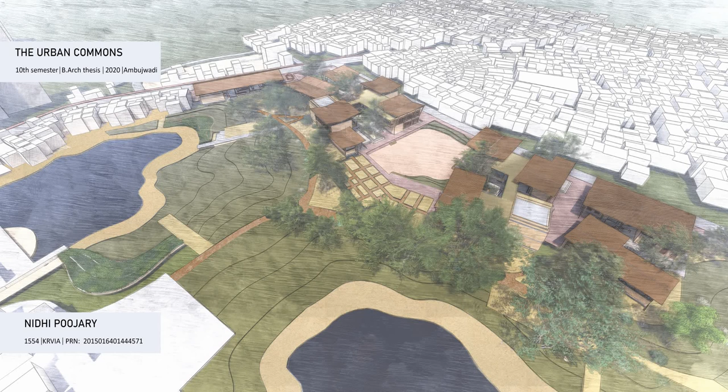My name is Nidhi Poojary and my topic is the urban commons.

The presentation is divided into 4 parts: the argument in brief, the site study which has the programs and site analysis, the design, and the technology which has the details and the service systems.

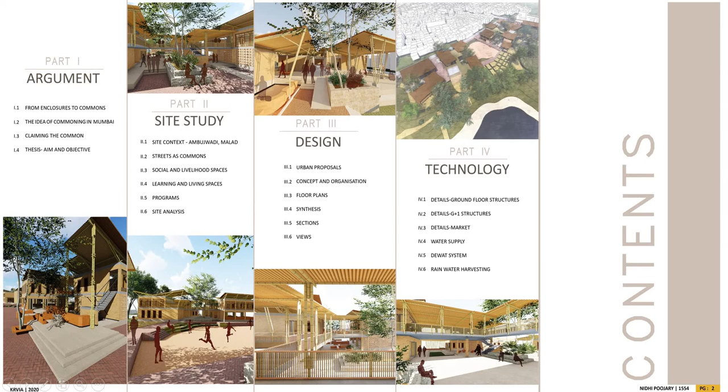From enclosures to commons. The concern in recent times is that there is a loss of urban commons due to privatizations, enclosures, spatial controls, etc. These only cater to a certain class of people who are privileged, and hence arises the idea of commons.

So what are the commons? Communities have various relationships with the spaces around them. They tend to appropriate a given space. This taking over of space or laying claim to a space is commoning. These shared spaces act as resources to all, and they are managed by the people themselves.

There are 3 aspects to the commons. They have a non-commodified common pool of resources which fulfills people's needs. The commons are necessarily created and sustained by the communities, and to common is a verb that is a social process that creates and reproduces the commons. The important thing to note is that the communities define the management of these resources and how they are accessed and maintained.

The threats to the commons. Why are the commons at risk? Because cities in India are trying to reinvent themselves as utopias for investors and consumers. New enclosures are directed towards fragmentation and destruction of the commons, hence there is a need of defending space. There are various ways in which the commons are interpreted, but here in this project, commoning is mainly looked at as a mode of resistance to commodifying.

The last part talks about the right to the city, or city as a co-created space. A potentially liberating space can be seen as a network of spaces belonging to nobody and everybody at the same time, which are not defined by a fixed power geometry but are open to the constant process of redefinition.

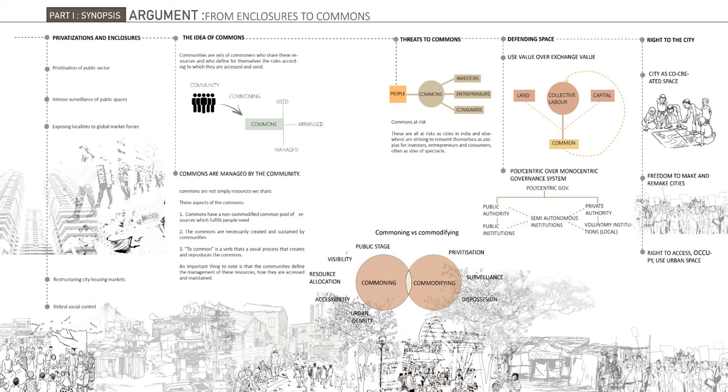The ideas of commoning in Mumbai. In a more traditional sense, the commons are these shared natural resources like tabelas, fisheries, forests, mangroves, etc. People access these resources that are not commodities and are not strictly classified as property. These are government lands that are used for livelihood dependencies.

For example, the commons for fish workers constitute not just the sea and the water bodies but also several areas along the coast used as landing grounds, weaving, or repairing, etc. These livelihoods are permanent or seasonal sources of income for a range of native people. The people have turned these private or government lands into common pool resources.

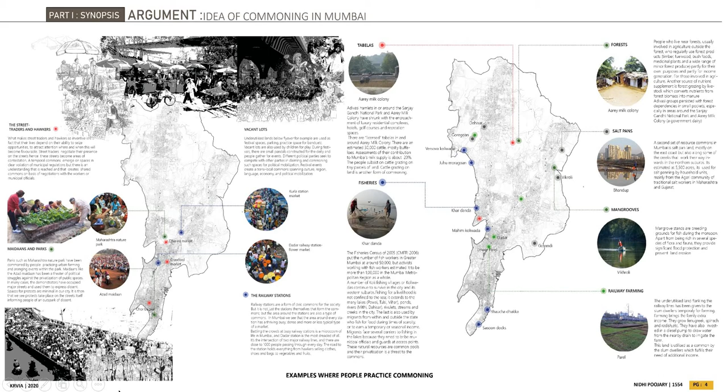But in today's urban context, it can be interpreted in several different ways. Certain ways in which people use the streets, the maidans, parks, the vacant lots, or the residual areas in the city can also be termed as commoning. These kinds of commons are going to be explored further in the project.

I visited several sites in Mumbai such as Ambujwadi, Bheemchaya and Mandala. Here, auto-constructed settlements seem to grow out of an awareness that commoning is necessary and helpful. Land occupations make people confront from the beginning the problem of building a family shelter with the necessary help of others and emerging community. Some auto-constructed facilities are created, either water tanks, rubbish collection points, or social spaces.

The arrangement and maintenance of the streets in this settlement is also indicative of practices of commoning. The street is not a necessary residual space but a space which is formed through collective decisions and collective work. Ambujwadi, a settlement in Malvani, has been demolished multiple times, but there is some sort of collective resistance seen here, trying to reclaim the land for their own sustenance.

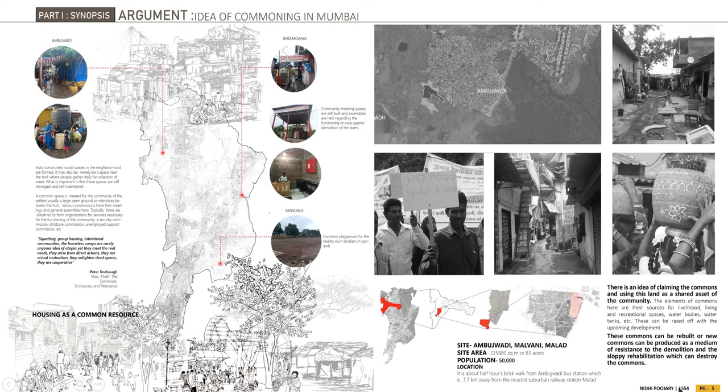What the project is taking from the case study of Ambujwadi is that it's trying to understand the existing commons on the site, look at it through the perspective of collective claims made by the community, and try to rebuild those commons so that it can be used as a shared asset of the community. And that is the aim of the thesis.

It's an attempt to rebuild the urban common as an equitable and accessible resource to all. It's also addressing architecturally the creation of these commons and how design can contribute to it, and how it can empower the community and reproduce their life in new ways.

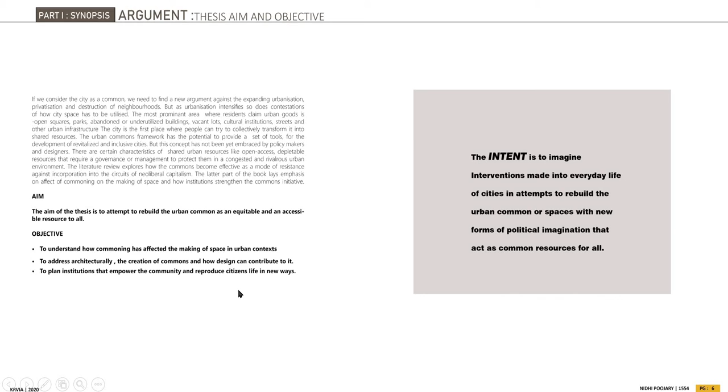The site context: Ambujwadi is present here at the bottom of Malvani in Malad. It's about 7.7 km from the nearest railway station, and there are a number of bus stops present in Malvani to reach it. In terms of educational institutions, there are a number of colleges or schools in Malvani but none in Ambujwadi.

There are some MHADA and MIG buildings over here, but Ambujwadi is a completely informal settlement, and there are some open grounds and municipal markets in Malvani, but none in Ambujwadi.

According to the DP 2034, the people will be rehabilitated in this rectangular plot present over here, and this part of the site also comes in the CRZ II zone.

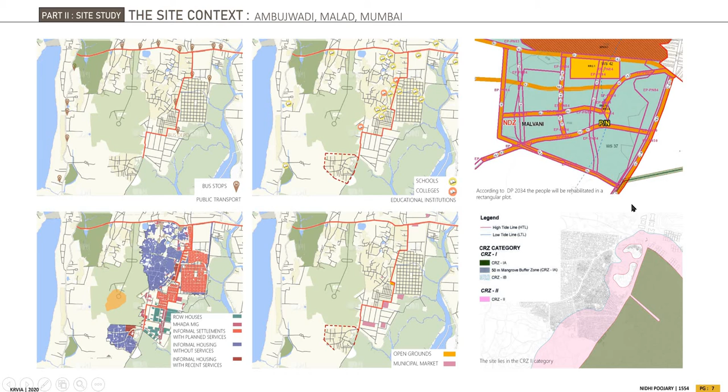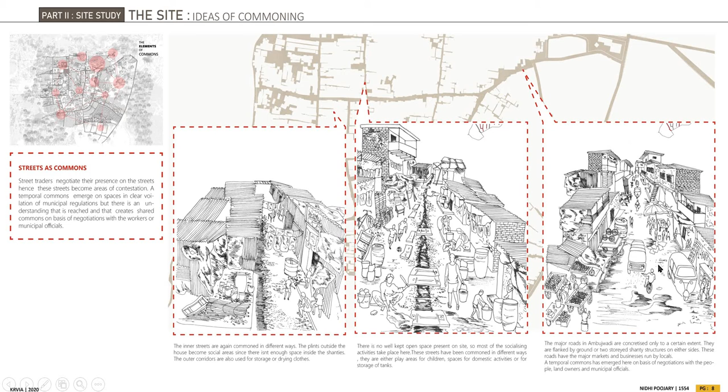The ideas of commoning present inside Malvani include streets common for domestic purposes, play areas or social activities, and major markets and businesses run by the locals. Social spaces and community activities usually take place in shaded areas, temples or mitra mandals, which are either self-constructed or sponsored by local political parties.

The activists usually meet in these areas to fight against unjust policies, or it's also used to organize informative skits in and around Ambujwadi.

The livelihood spaces - I was looking into different forms of labor, whether secondary or tertiary. Garment factories have proliferated throughout the slum, making children's clothes or women's dresses for the market. There are other informal activities where women usually engage in domestic manufacturing of pins, earrings, etc.

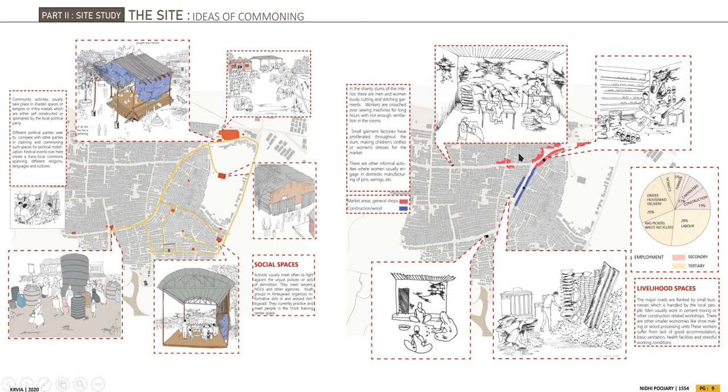Men usually work in cement mixing or other construction related workshops. There are smaller economies like shoemaking or wood processing units.

The learning spaces - schools are about 2 kilometers away in Malvani. This area is devoid of any kind of education facilities, hence few people have taken the responsibility on themselves to teach children. Tuition classes are the most visible form of educational spaces which happen in the house itself, or there are also some others.

These spaces for learning are present within houses of people, or they are small auto-constructed or abandoned homes due to lack of resources. There is also the youth group Yuva that has a central learning space.

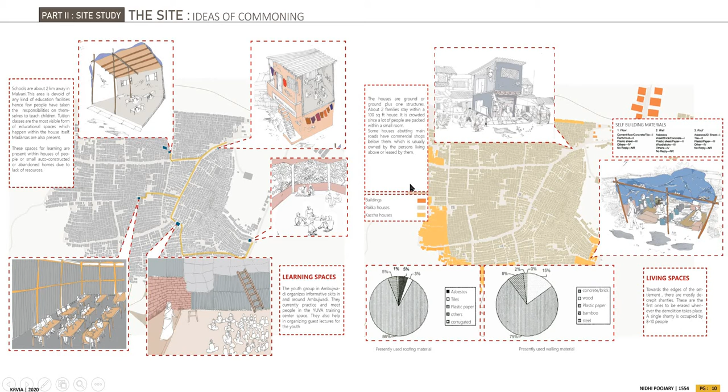Living spaces - I've just looked into the materials that they have used and what kind of pakka or kaccha houses they have built. So the programs for active groups or initiatives that are present within are fighting for the rights to education, jobs and housing.

And for the untrained and unemployed people who could acquire skill and work experience, the possibilities were technical aid, participatory and cultural, where technical aid provides employment through garment manufacturing or cooperatively owned local products market, or some use of underutilized space.

Participatory could be a community development center with community organizers as an advisory agency, and cultural, where theatre is seen as a means of promoting social and political change, and hence theatre, films or stage area for debates could be present.

So the programs were divided further into community, livelihood and educational, and the community block has the assembly stage, the development and planning cell, the seminar area, the cooperatively owned market, the accounts and information desk.

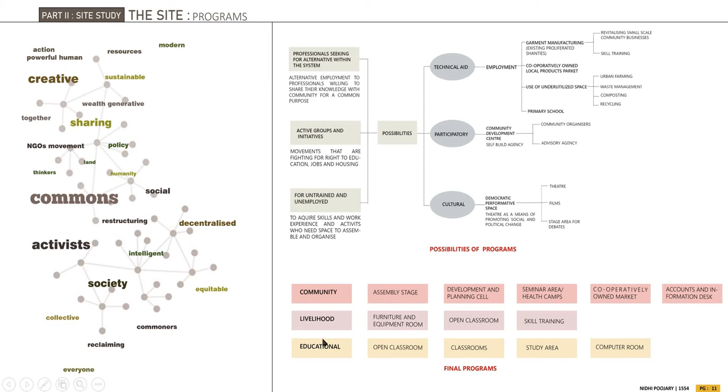The livelihood has a furniture and equipment room, the open classroom and the skill training, and educational has the open classroom, study area and the computer room. So these were the final programs that I was fixing.

So this is the site, and the site of intervention that I have chosen is over here. The sections are cut through the edges of the site. The site of intervention is this empty plot of land which is there, and the edges have these water bodies.

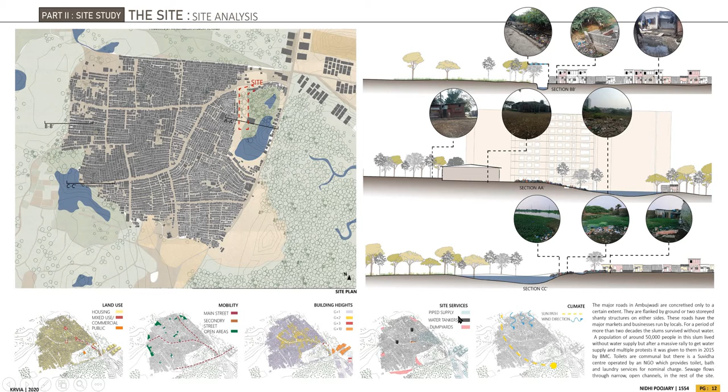Which are right now polluted because the sewage is flowing into them, but I have looked into it in the services part, and there's a site analysis done of the land use, the mobility, the building heights, the site services and the climate. So here I've looked into what could be done for the general upgradation of the conditions.

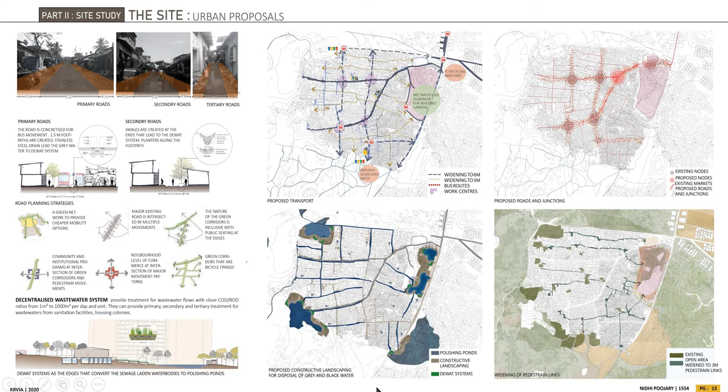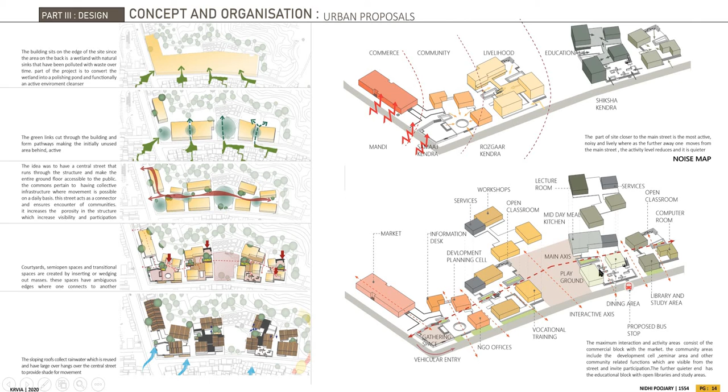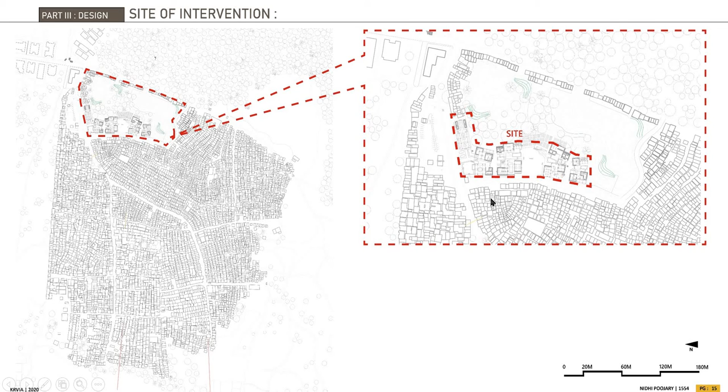So this is the site of intervention in Ambujwadi. The same in the models.

These are the process models that I made, which were basically to experiment with what way the building can respond to the central street. It was also looking at the creation of multiple courtyards at the central area.

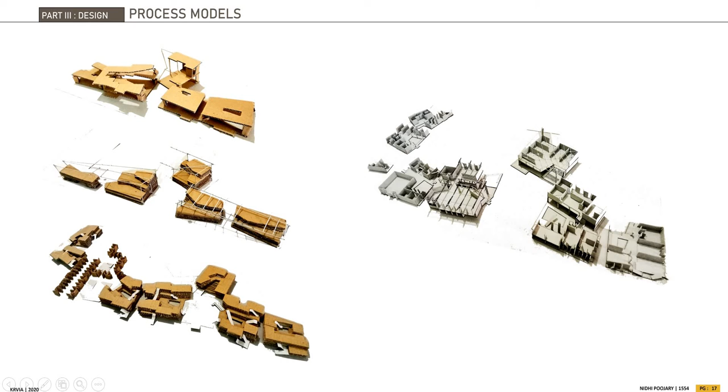The market area alongside this amphitheater area or the gathering space and the main street over here can accommodate a range of self-organized activities, whether it is seminars, debates, demonstrations, plays, or just socializing or eating. This space presents an idea of equality, centricity and informality.

The information desk gives information about the latest programs that are taking place in the educational and the vocational blocks.

The Development Planning Cell and the NGO offices ensure the engagement of the community with voluntary architects or social workers, which might lead to collaborative and participatory design. The vocational training workshops alongside with the lecture rooms and the open classrooms are helping in revitalizing the small-scale community businesses by training people in skill.

The design is created with minimum enclosures. There are certain private rooms that are created, but that is for the protection of the equipment. Otherwise, the common areas are having a direct entry from the settlement.

This playground is acting as a buffer space between the two blocks. Since the programs here are more quiet, it can also host several events and it becomes like an active central public space. Since open spaces are very scarce in Ambujwadi, as much of it is given in the design, plenty of social spaces are created for the material value of the community.

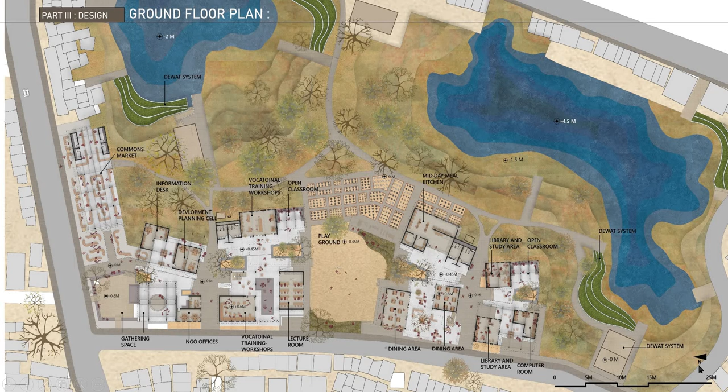The first floor plan: the vocational training workshops, lecture rooms, libraries and study area extend up to the upper floor.

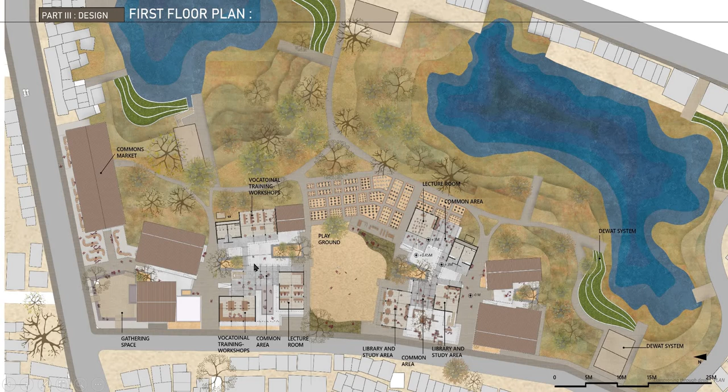There are bridges connecting these two wings of the building, with plenty of common area in between. The use of this common area is not defined as such, but it has simple sets of modular furniture that can be used in multiple forms, broadening the range of activities. These bridges also create overlooking spaces which further increase visibility.

Commoning through design: I did a case study of an educational center built in M Ward by Tata with the help of the local municipal corporation. I looked at the model they followed, where the municipal corporation, the people living in the settlement, the NGOs and the organizations come together for planning, design and funding.

The project and how it gets constructed, the model was basically built on the case study of the Educational Institute in the M Ward. Design helps in what way people take care of the space.

The street that is forming in between is not necessarily a residual space, but a kind of space with a new meaning that can be termed as a common, in order to distinguish it from public and private space.

People simply do not use the space given to them by a public institution, but they mold it according to their collective needs. The design could have spaces and resources that could be accessed freely. The space didn't have fixed meanings but was open to the process of constant redefinition.

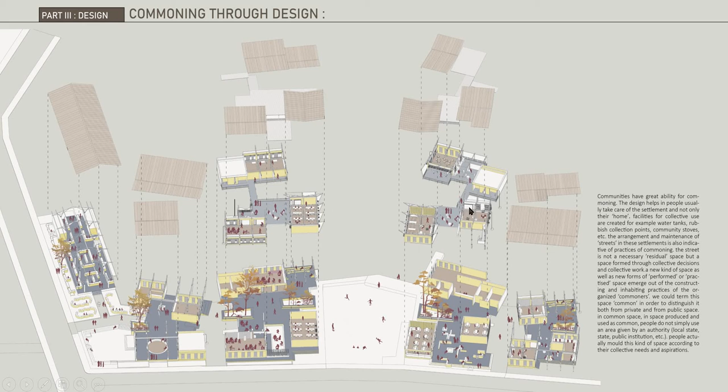These access points from the settlement, plenty of socializing space and the common areas present contribute to the idea of commoning.

The sections: this is a section of the library and study area, directly connected to the main road. The building also has large overhangs to give shade to the central area, mostly functioning like an extension to the inner function.

This is a section through the kitchen and dining hall, again with a lot of common area given as a dining area for the canteen. The space adjoining the street is more like a transitional space which does not create any alienation of the building from the street.

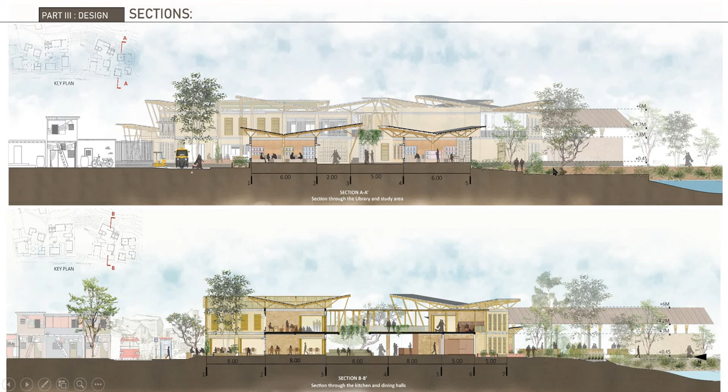There are also pathways on the back side of the building next to the polishing ponds. This is the section through the lecture room and open classrooms, and this is a section through the training centers.

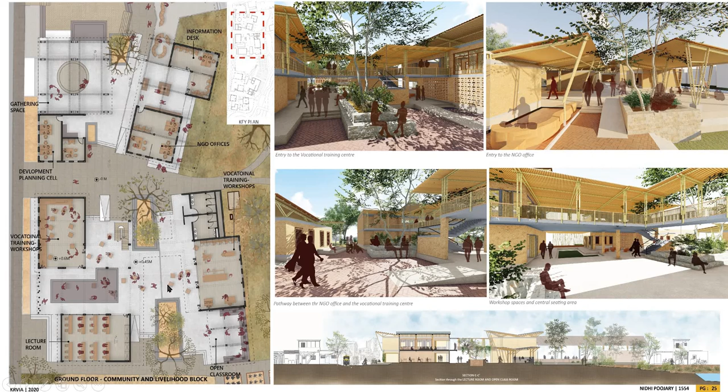This is a view of the entry of the vocational training center, the entry to the NGO office, the pathway between the NGO and the vocational training center, and the workshop spaces and central seating area, which is this huge common area here.

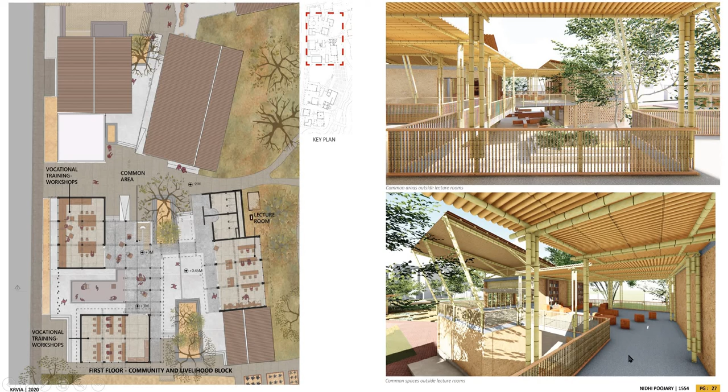This is the community and livelihood block and the common areas outside the lecture rooms. So even if the room is occupied, the outside area can always be used. This also has fewer partition walls, which gives more visibility and more participation.

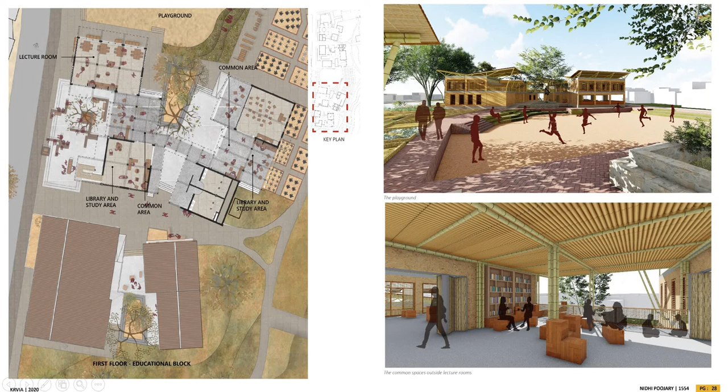This is the educational block and the playground between the two blocks, and the common area outside the lecture rooms. These are more views of the common area, the vocational training center, the outside, and the space on the backside.

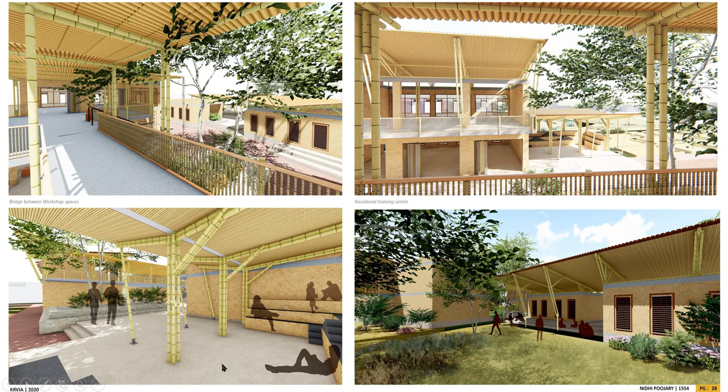And the common classrooms. The ground floor structures use bamboo as a primary material, combined with certain materials like bamboo corrugated sheet or wooden planks, but mainly bamboo with the help of studs and pins is the primary material.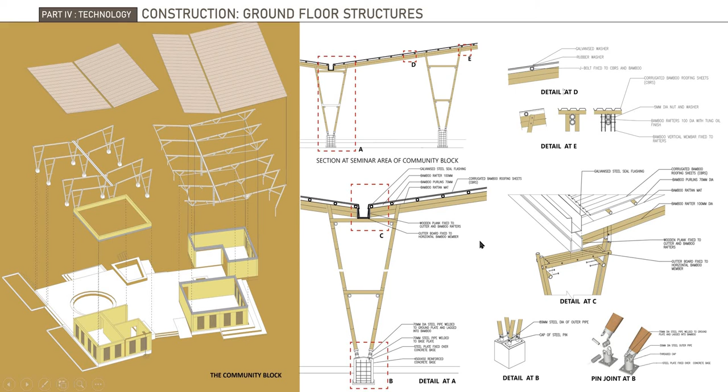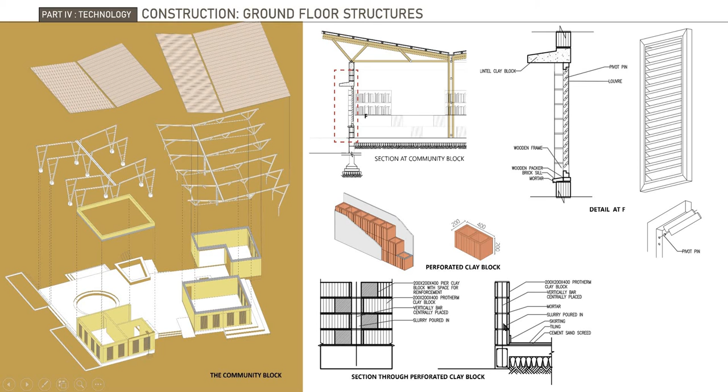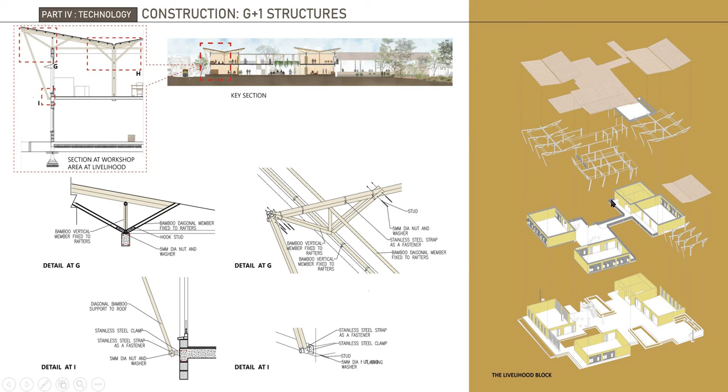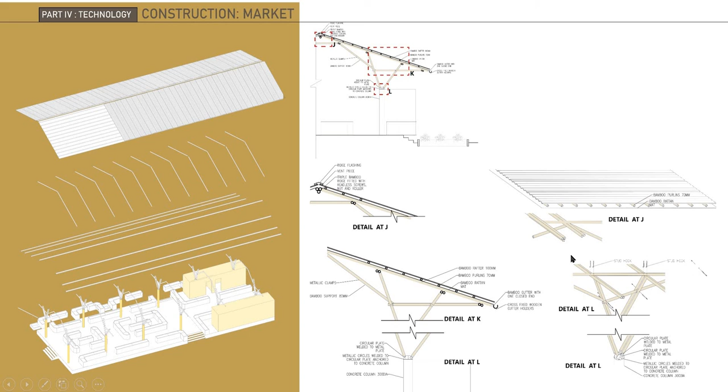This is the construction of the market area, which has a triple bamboo ridge fitted with headless screws and nuts. It is attached to the circular plate, which is welded to metallic circles, which is fixed to the column. The detail of the joint is also given here.

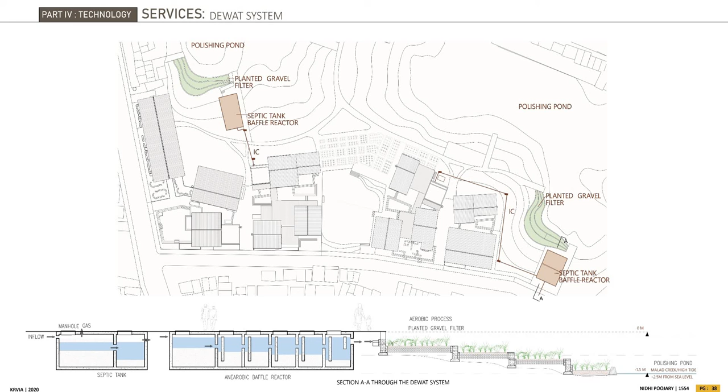The water supply calculations and the water supply. The DEWAT system calculations, the DEWAT system along with the section. The rainwater harvesting.